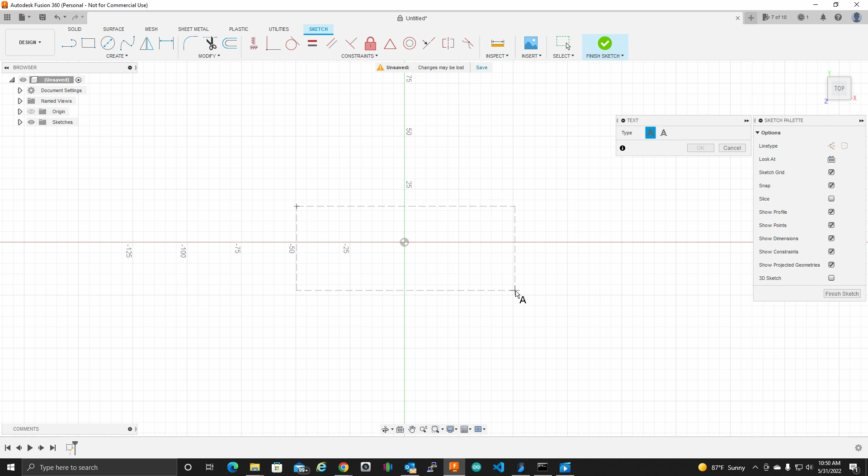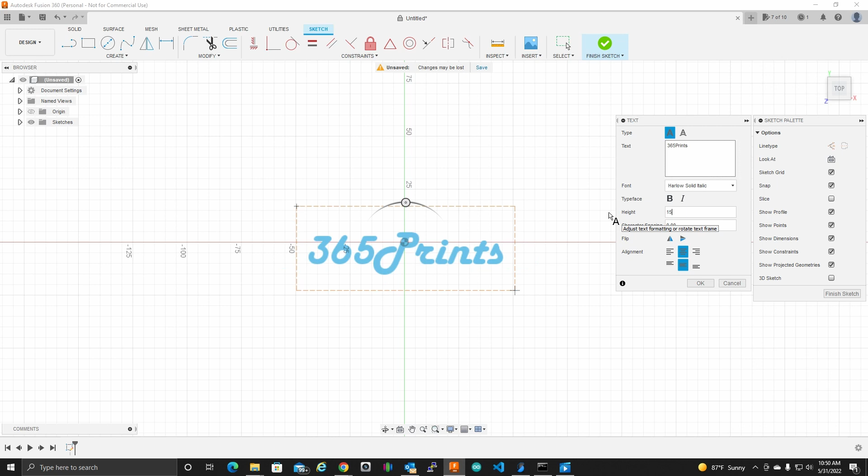I'm going to create a sketch here on the bottom plane. Let's put some text here. Let's do something like that. I'm picking this Harlow Solid Italic font, which I'm not happy with some things, but it's going to work here. Let's bring down that size a little bit, something like maybe 18. Yeah, that looks good. Okay.

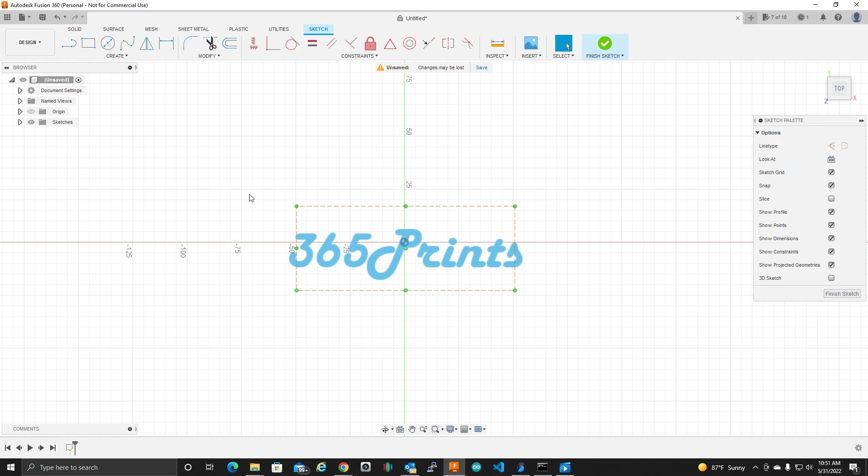I'm going to try to do an offset here of this whole thing. Let's see, cancel. Let me select everything first. And then offset. How come that's not working? Let's see. I need to right click on this. I'm doing this on the fly here, folks, this is the first time I'm doing it. So let's see, explode text. There we go. Yeah, now we'll select everything and hit the offset here. And

I might just stick in some Jeopardy music or something, because we're gonna sit here and wait.

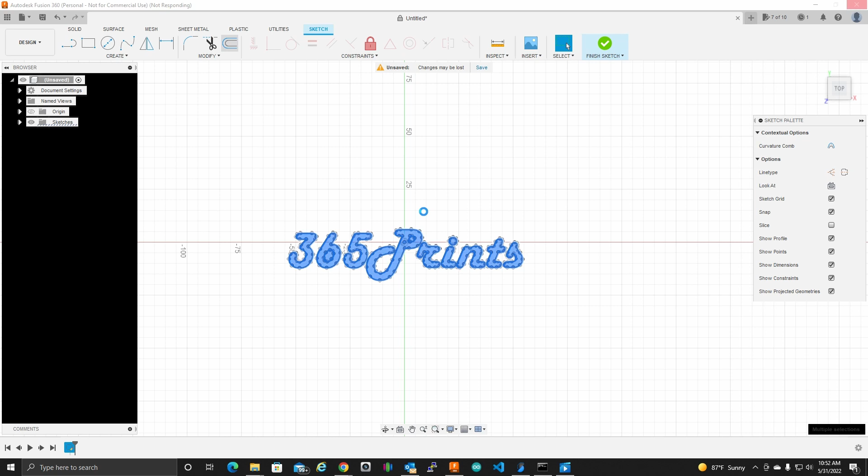This is the only way I really, if I select offset first, I'm able to select like the 3, but I'm not able to continue on and select other objects. So what I'm doing here first is selecting everything and then clicking the offset, and you'll see it's not perfect, but it's going to do exactly what I'm looking for. Okay, so here it's back, and now we need to put in the offset position, and you can see what it's doing here. If we go, oh, I guess that's all correct here.

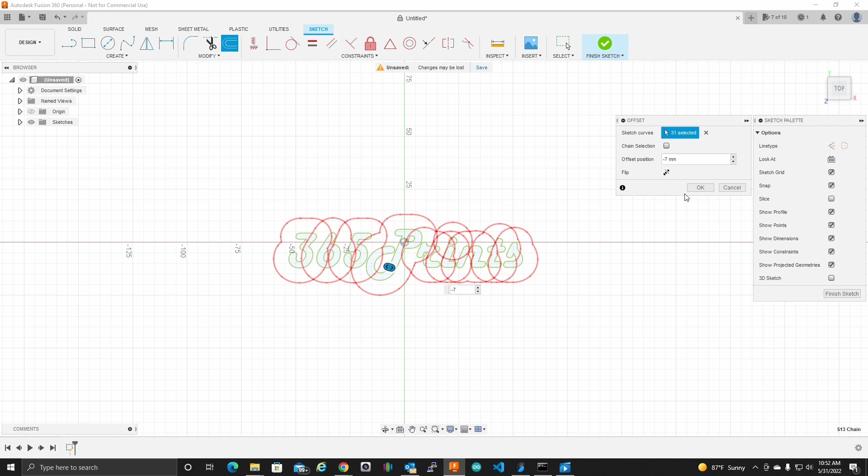So I want to explode this out to maybe 8. Sorry, -8. Why didn't it do the 3? Look how it didn't do the 3. Oh, and 7 it will. That's interesting. Okay, so 7's fine, I'm going to click OK to that.

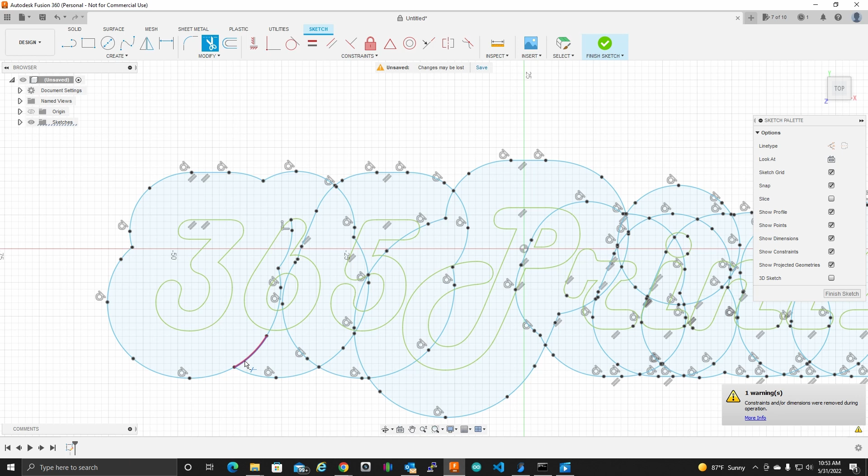Okay, now a tedious thing here, I want to get rid of all of these. I just want the outline here. So, if there's a better way for me to do this, please let me know in the comments. But I'm going to go ahead and start trimming away the items I don't want. See, I just want the outline here. So I'm going to start with those 2 and then work my way in. I may just speed this up for you so you don't have to sit here and watch me tediously do each one of these. Oops, there was a mistake. Control Z.

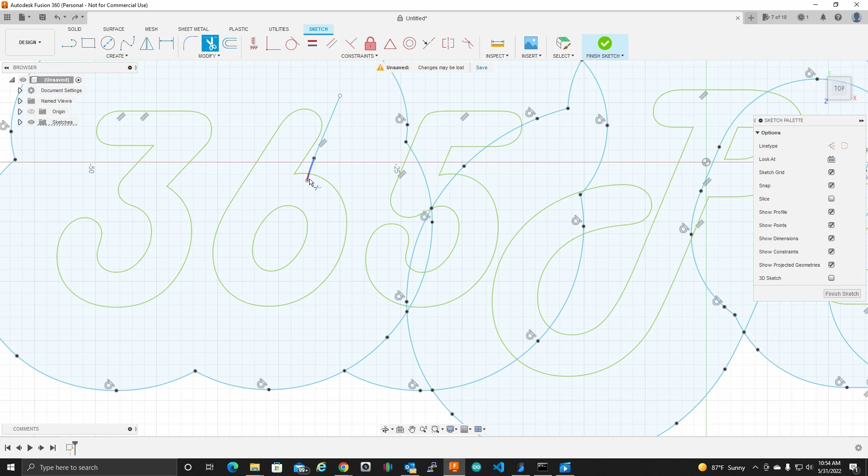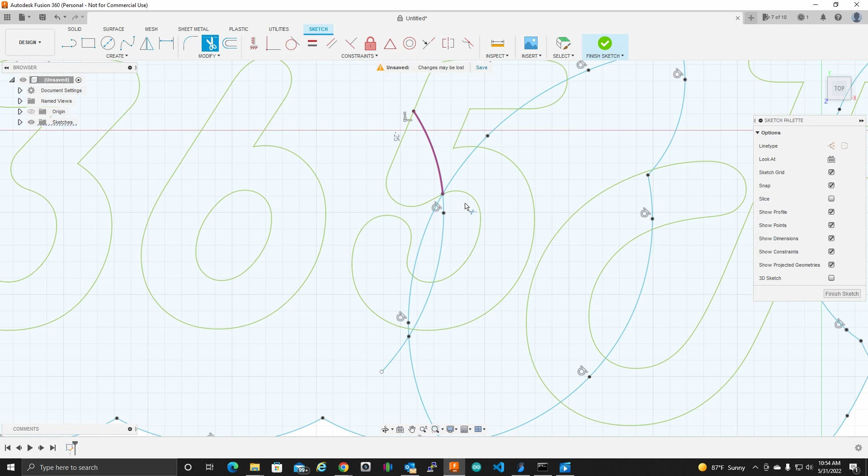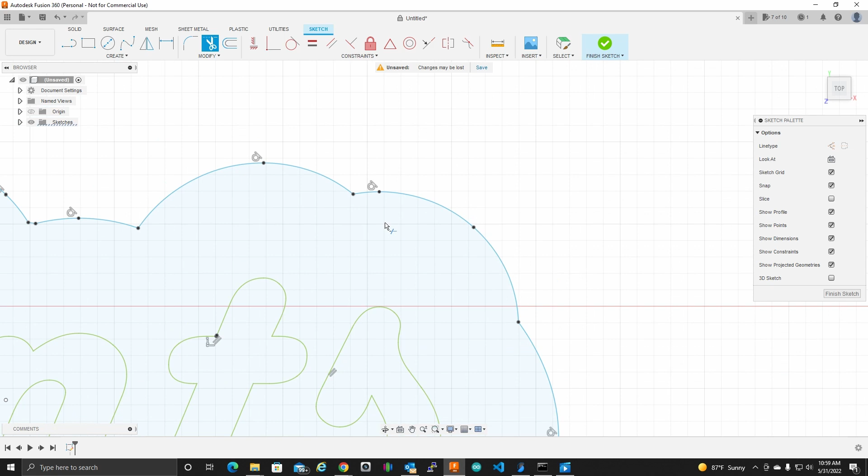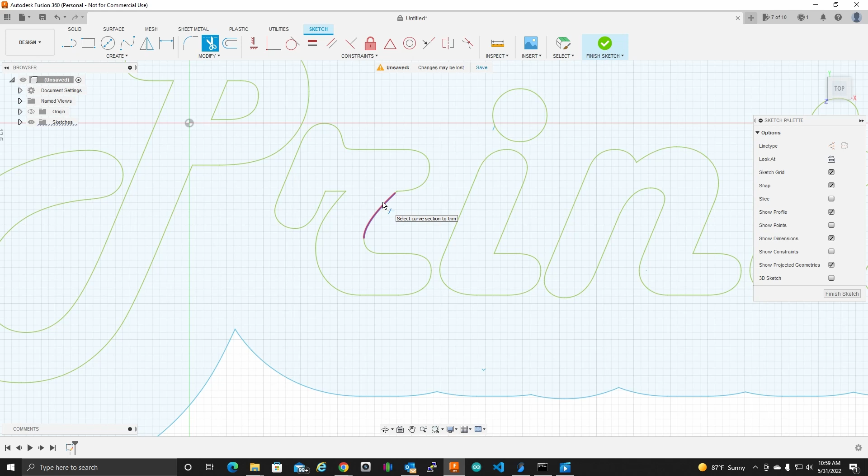Back to trim. I kind of like to start by taking care of this portion and then this portion, and that helps me exactly know what I need to completely get rid of here, which is this full line. Click, click, click, click. We're almost done here, I think. Okay, what do we got? Oh, isn't that pretty? Let's turn off the constraints and the points here. And oh, look, see, there's some residuals. Whoops. Trim. And did I see, look how these ones are showing up here. I don't think these are going to hurt anything, them actually being there, but I'm going to be a little anal about it. Okay, that looks good.

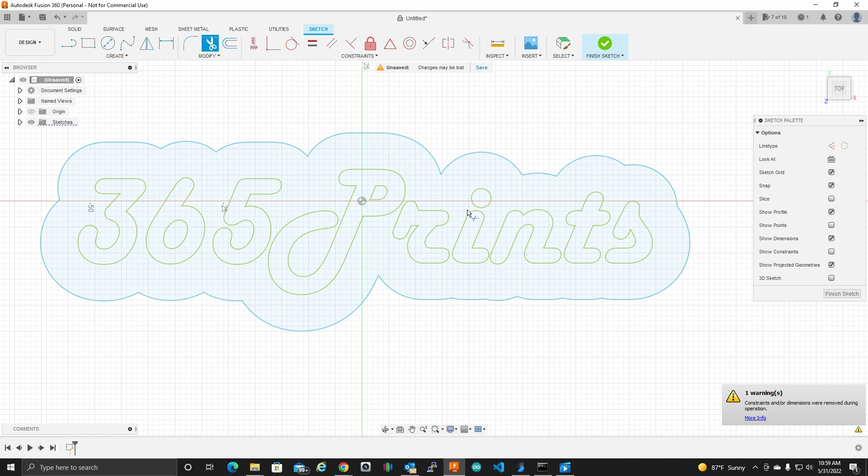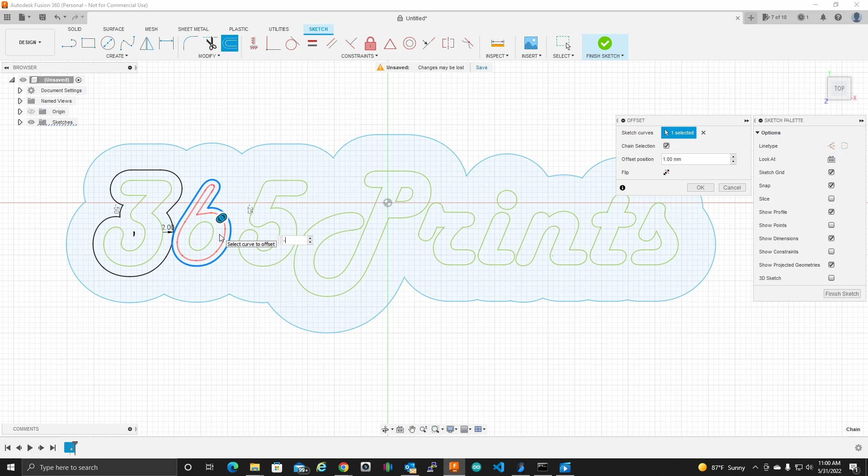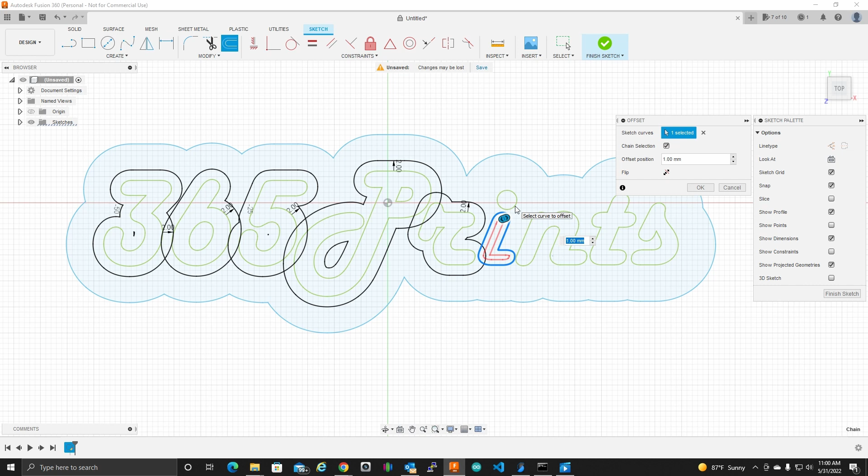Next, we're going to do another explode. We're going to do several explodes here. So offset, let's select the 3. We'll do -2. Boom. Same thing for each -2, for each digit, for each character. Keep going along. -2. -2. -2. You know, if I do, yeah, see, it won't let me select multiples. Why? I'm holding down Shift and Control. Okay, no, -2. And then we want to get the little, we want to dot the I. And -2. Offset, -2. Offset, -2. Okay.

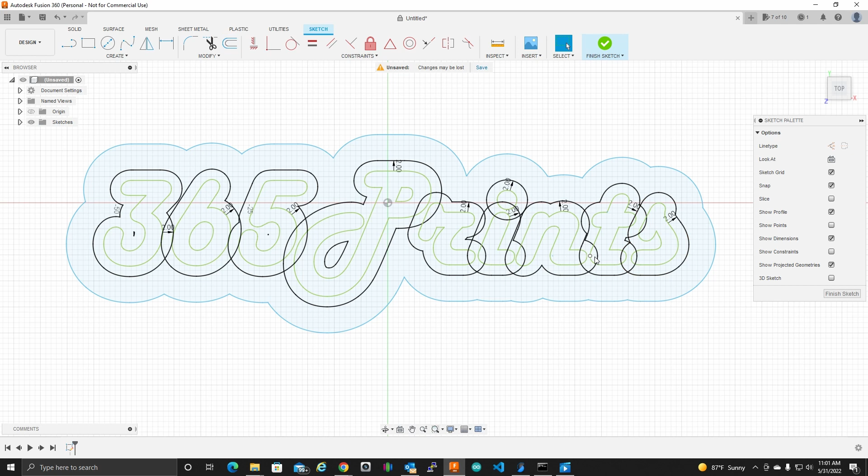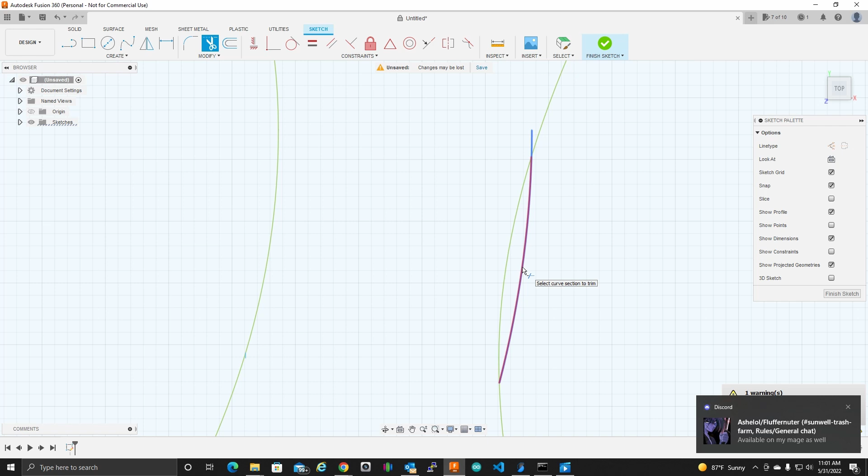We have some more trimming to do here. So I just want, again, the outline here. So we want to get rid of these internal lines here. See, there's my Discord again. Boom, and those are going to stay. So this.

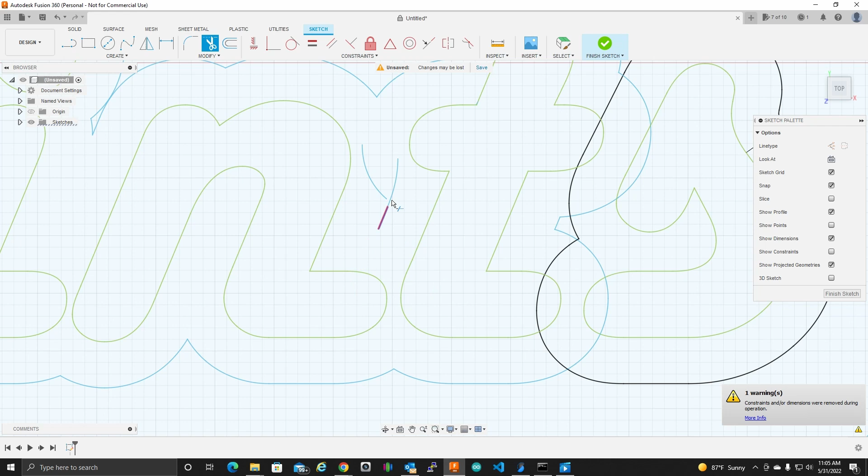Let's get rid of this too. That's silly, that's not enclosed. It's not like this thing, or an I. Okay, that looks good, doesn't it?

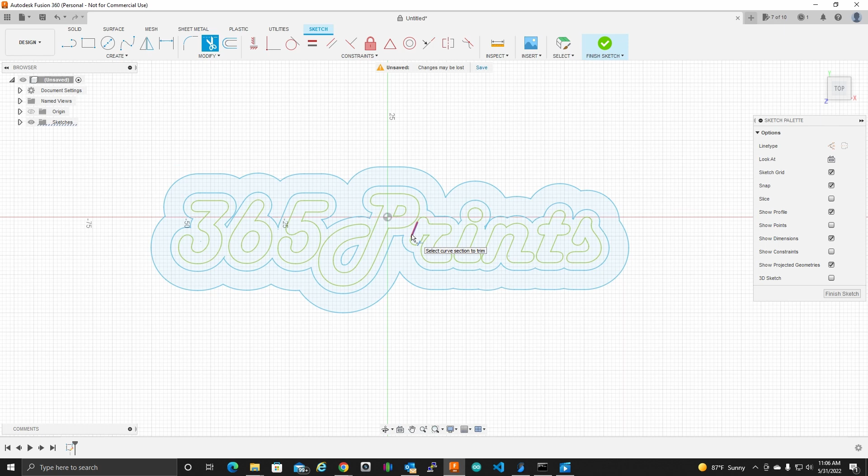Okay, we're gonna finish the sketch. Let's do some extruding. I'm gonna go up. This is just gonna be like a keychain thing. So let's go up just 3 millimeters.

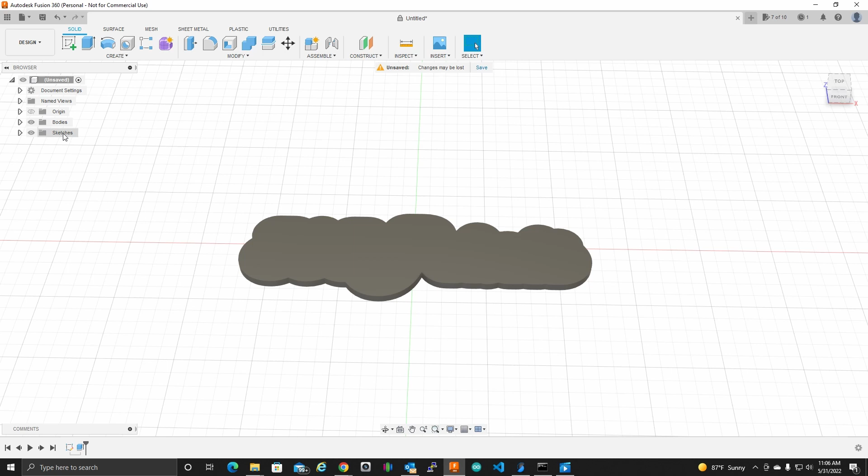Okay, that takes care of that outline. Let's bring back the sketch. I do want to turn off the body temporarily, otherwise I wouldn't be able to select. I'd have to just turn off the body. And now we want the outline, see? But we also want these two portions here. Whoops, what happened there? I want that. There we go.

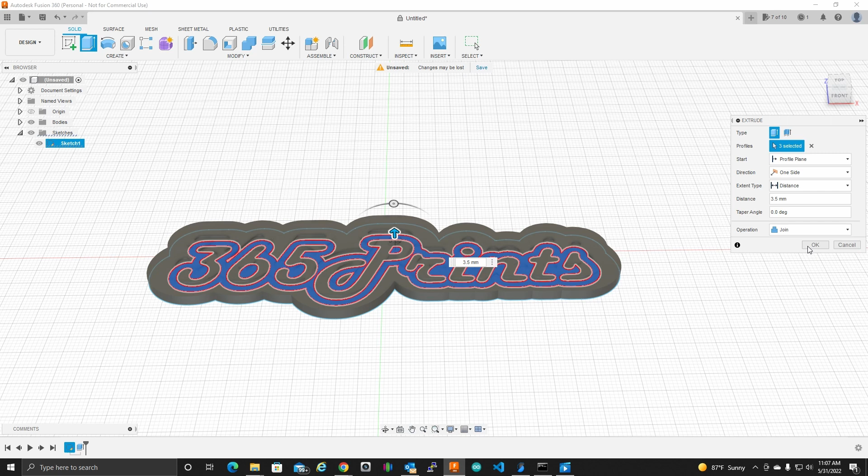Let's extrude that like 3.5. We don't want to cut it, we want it to remain a join. Okay, and then one last extrude.

Let's turn off the body again. And now we're going to do each individual character here. And we're going to extrude that, let's say 4 millimeters. And we aren't going to cut, we're going to join again.

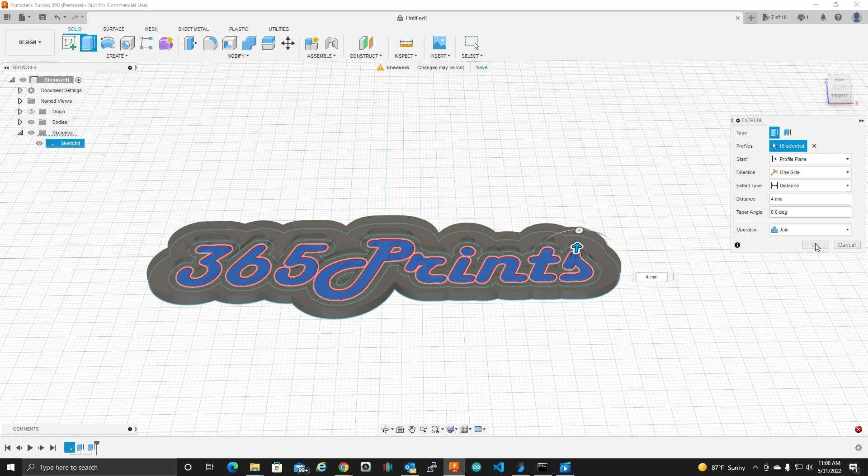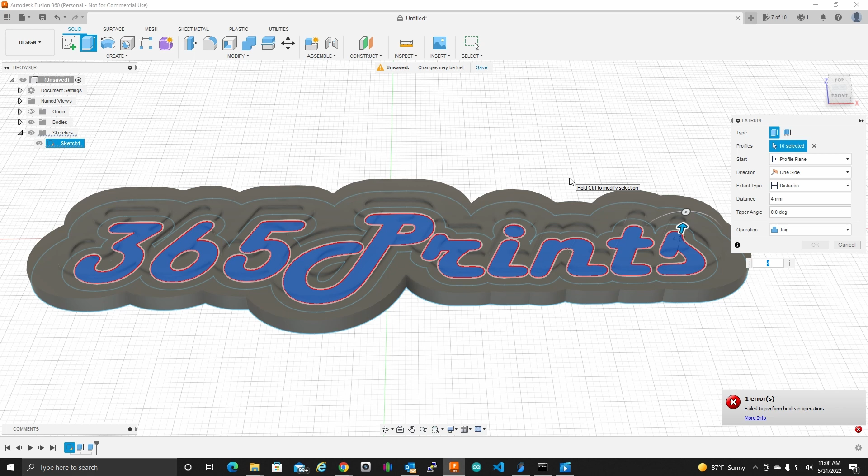I'm not sure if that's even real. Okay, whoa, why can't we do that? Let's cancel. Let's try that again. 3, 6, 5, P. Is there? Okay, a join. I want to do 4. Huh, I wonder why it won't let me do that.

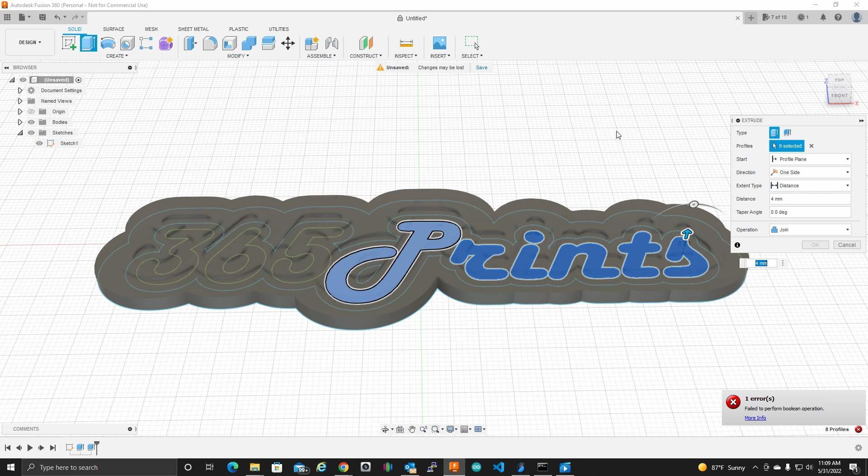It's something over here, is it? Gosh, I wish it would help me. So if I get rid of the 3, what is it not happy with? 13. Okay, so...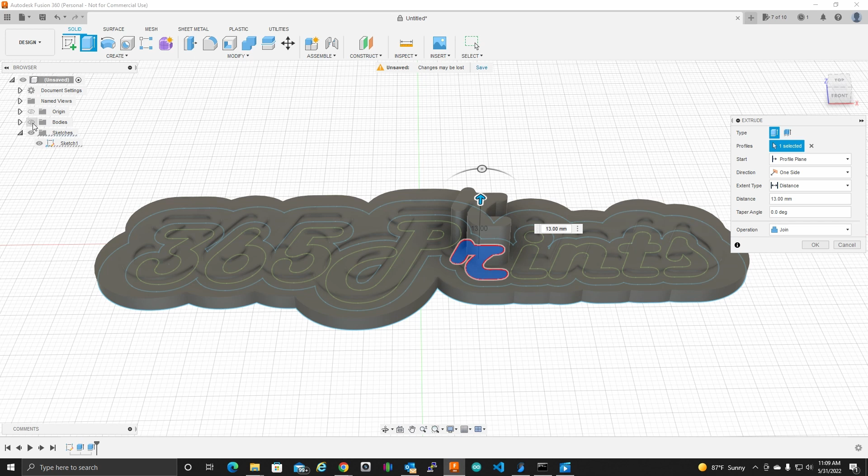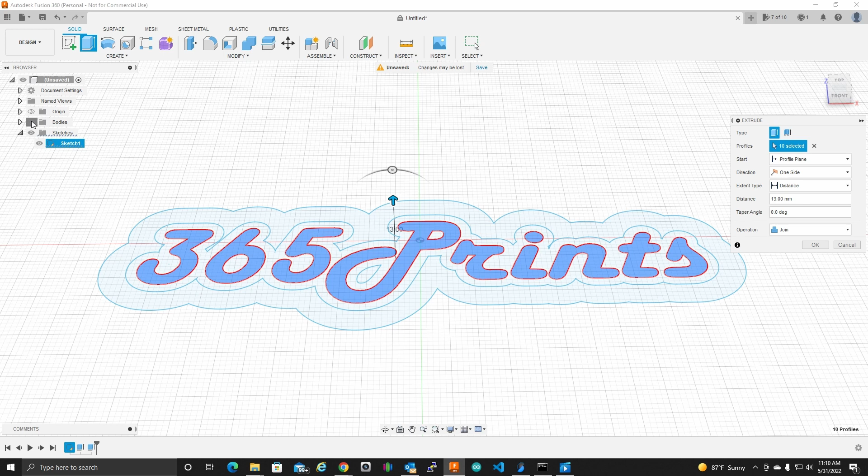Okay, all those letters it's doing, the I, the N, the T, the S, that shouldn't be a big deal, right? Is it this P that it doesn't like? Yeah, it doesn't like the... something wrong with this P. Did I destroy something? Okay, so let's do this, let's go 4.

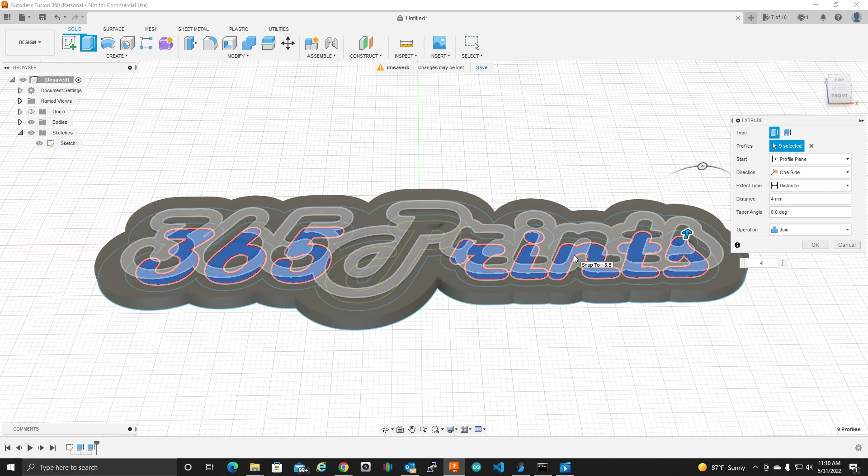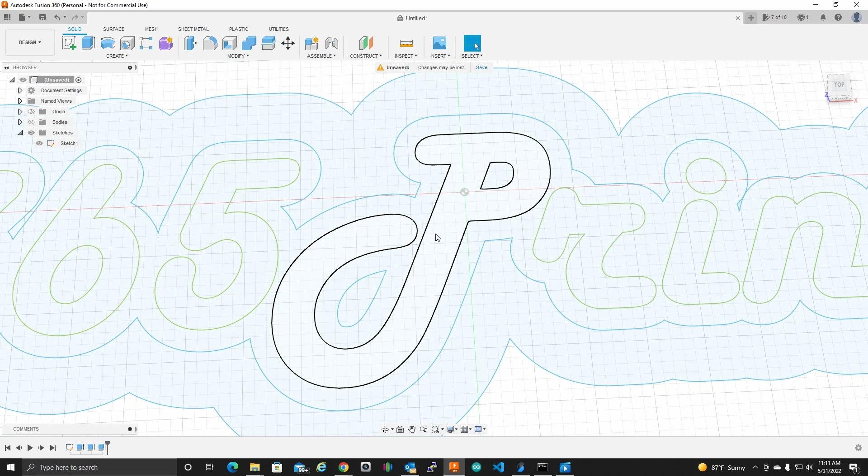Okay, so everything's happy except for this P. Oh my goodness, what is going on here? It's a solid body. I mean, what's going on here? Oh, look at that, do I need to trim this? Is this the problem? Okay, let's try it again.

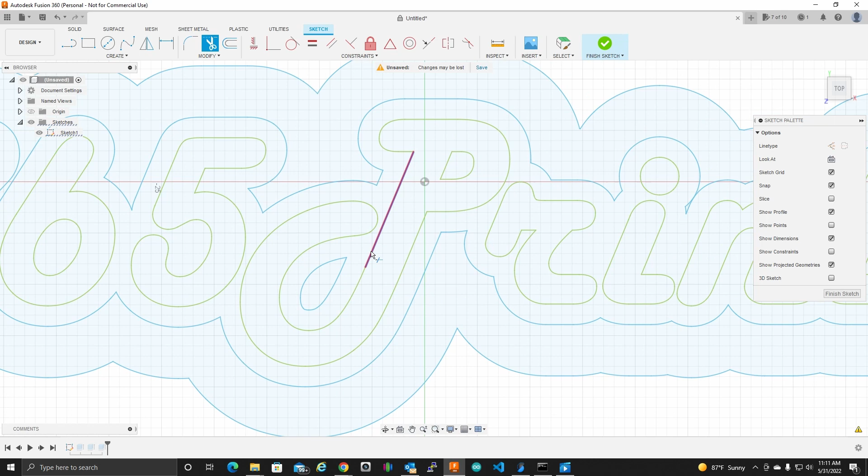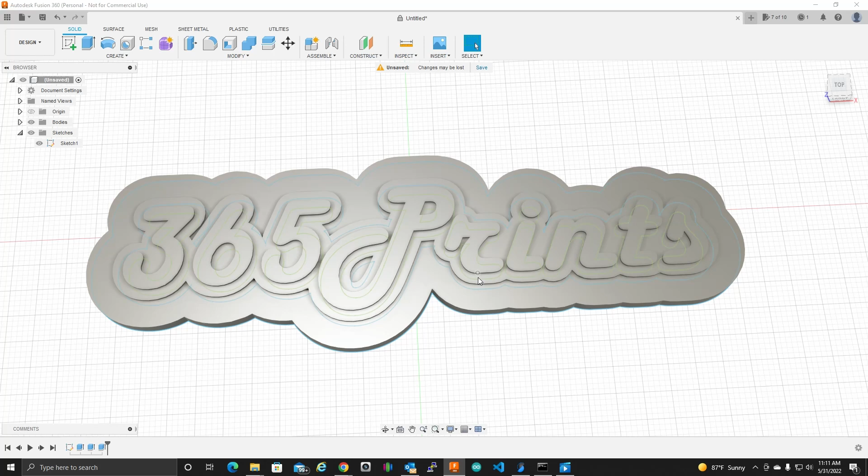Okay, so let's go back and edit this feature, and let's put back the P. Look at that, it worked. Turn the body on, and we'll turn off the sketch. Okay, so look at that, doesn't that look good?

We need a little hook or something over here for it, it's supposed to be a keychain. So I'm going to go use one of my previous videos on center of mass. Let's go to inspect, center of mass, select our object, and okay.

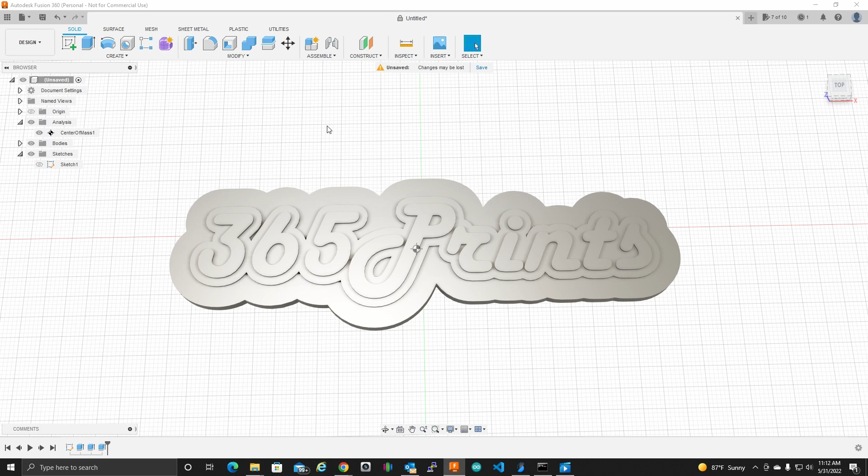And look what it did here. It put this icon here, and it added an analysis section to our tree that we can turn on and off, but it shows us where the center of mass is. So let's see, how am I going to do this here?

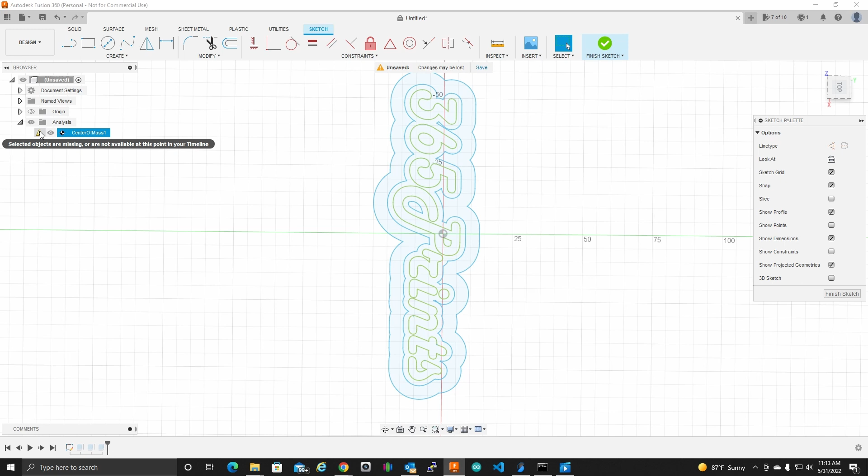Let's edit this sketch, I think would be the best thing. And I can't—selected objects are missing, or are not available at this point in your timeline. So do I have to... that's interesting. So I can't see that center of mass, I have to do a new sketch.

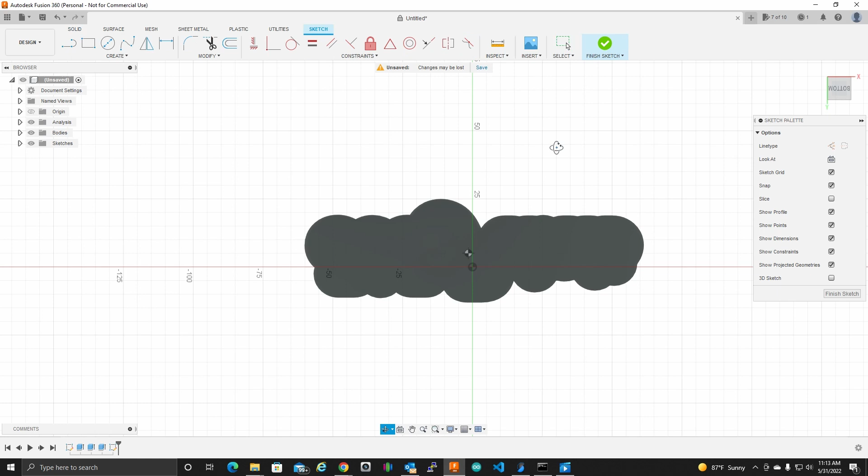Okay, fine, let's do a new sketch. We'll do it from the bottom here. See how my icon for center of mass is still here that I can use? I still don't know how to constrain anything to that. I can't seem to do that because I want to make a line here.

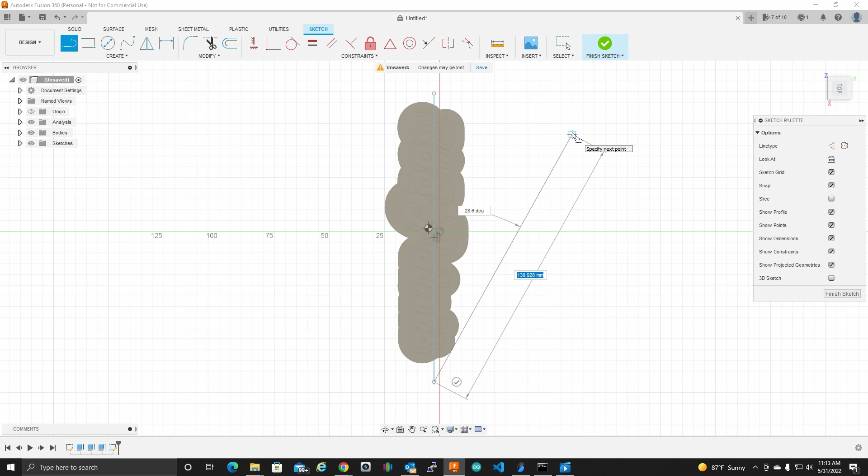Okay, and we're going to go ahead and make that a construction line. And I want to put this line right on the center of mass icon here. So I'm going to keep zooming in and getting this closer and closer. And I'm zoomed in about as far as they will let me. And let's get this line, that's close enough, okay.

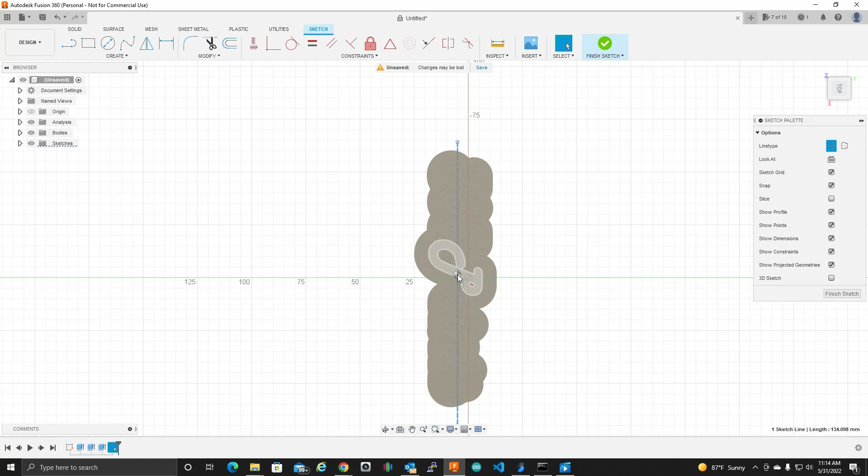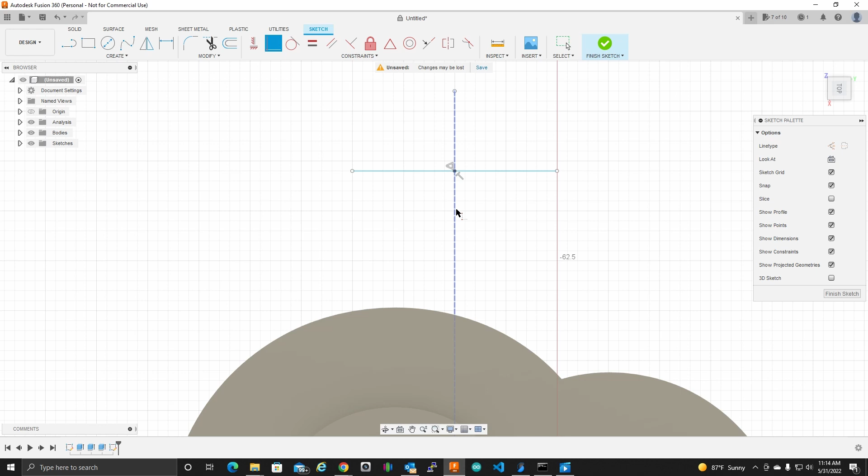I want to use this. Boy, look how close that is there. I want to use this construction. Let's make a line here. And I'm going to put a point on this line right at the center. And then we're going to make a constraint here. There, okay, so now the center of this line lies right on my construction line here.

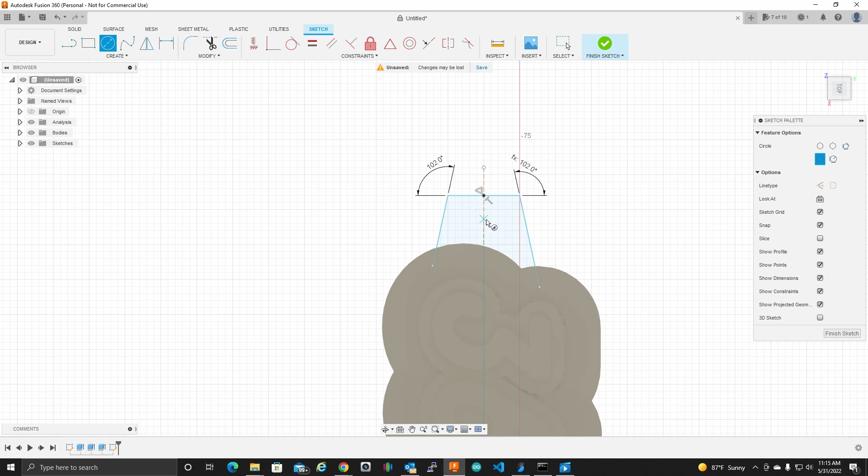Now let's do a couple more lines to connect this up. Something like that. Let's get, let's see, 103—let's go like 102 degrees, and the same on this side. Now we want a hole here about 5 and 5, and let's just make it 5 millimeters. Finish the old sketch.

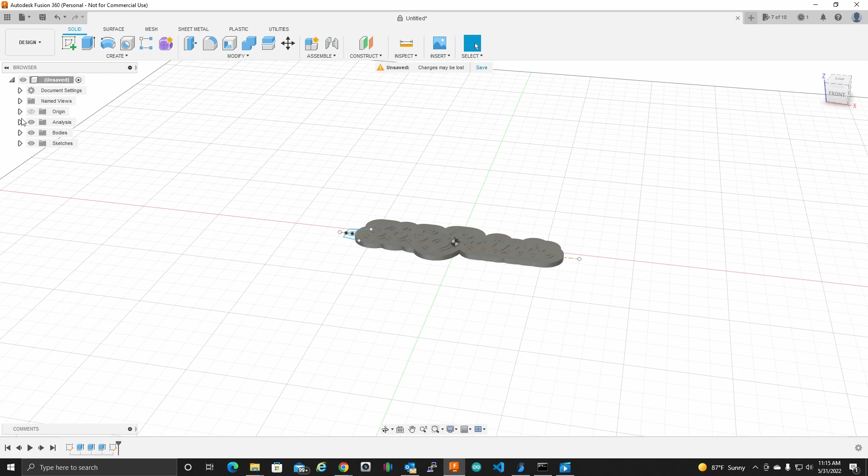Okay, I don't need my center of mass icon. We are going to do an extrude here for this. And what did we do, 3 millimeters? Whoa, that's the wrong direction, huh? Minus 3 millimeters. Now, I believe I do need to do a combine here

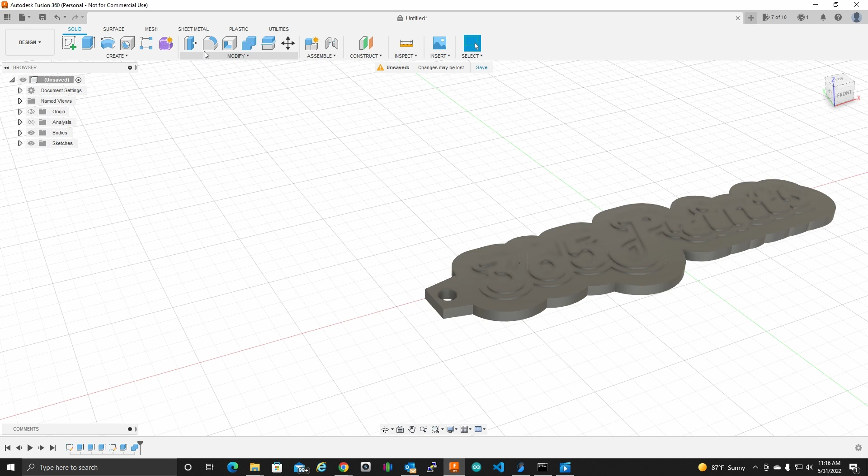because I would like to do a nice little fillet. Let's make this look nice. Oh boy, doesn't that look nice? Now, because I'm adding this, it might be changing my center of mass.

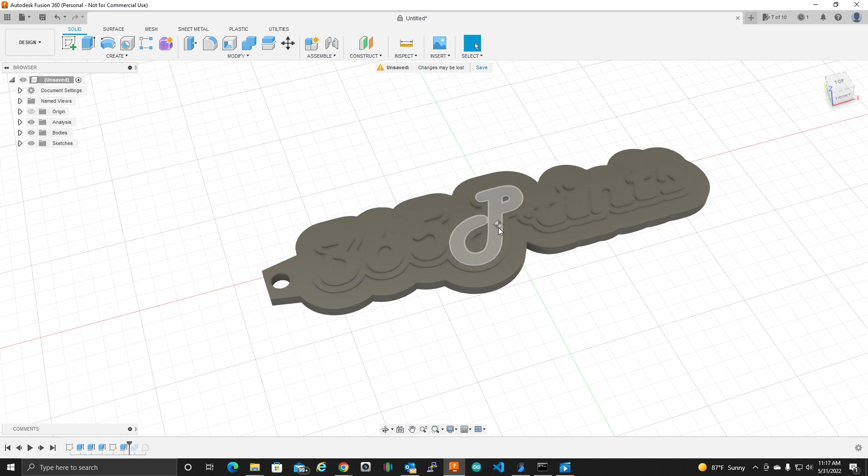God, it doesn't let me turn it on now. It's probably because it has changed since I added this object. A combine has been done. Let's see if we go back before the combine. Yeah, see, there's the center of mass icon. But because I combined this object with another object, that center of mass is no longer valid.

So it removed it. I'd have to do another one. But it's close enough. I just want it so that if it hangs, it's not hanging totally oblong.

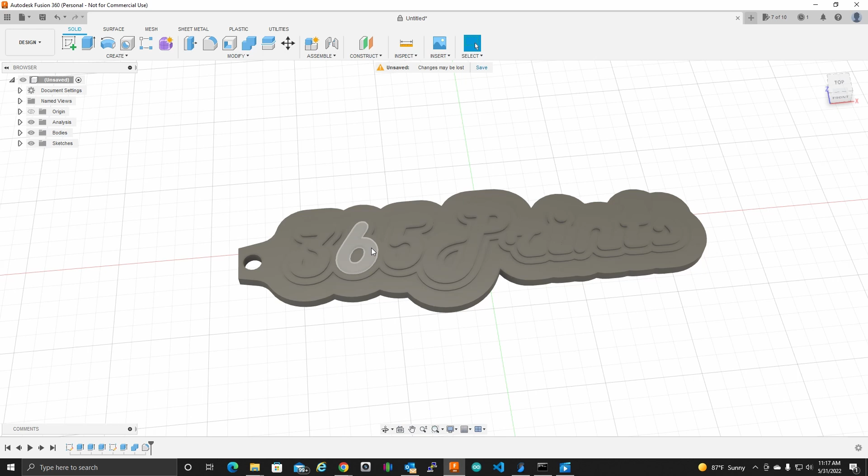I do want to do another fillet here. Obviously, doesn't this look horrible? Let's bring that in. That looks great.

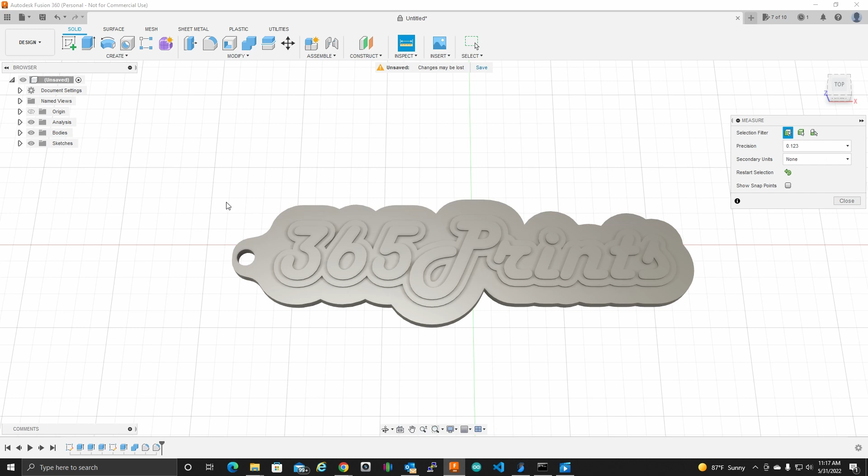Okay. 365 prints. Just let's look at how long is this thing? From tip to tip ish, 128 millimeters, looking at my ruler here. That's a little long, but that's decent. That's fine.

Let's bring this over to the slicer software here. I want to show you something in SuperSlicer that I really dig.

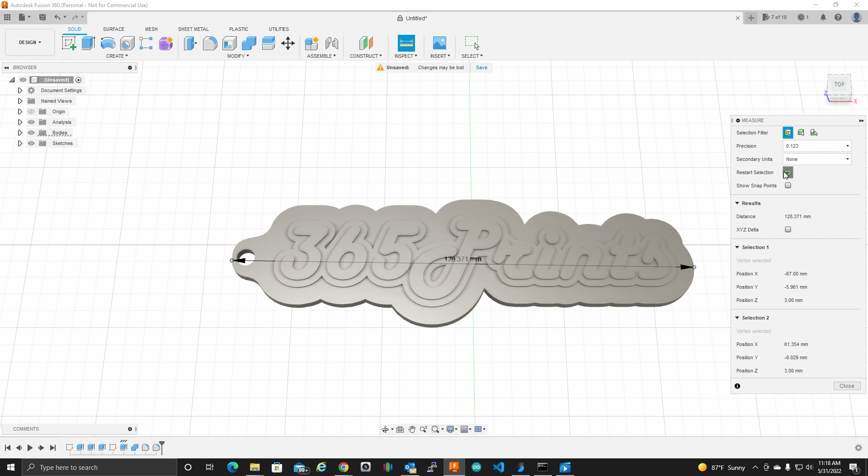Okay, let's bring the item in for slicing. I should have said, I am not a Fusion 360 expert by all means. You probably know this already. In fact, let's save this. 365 prints keychain.

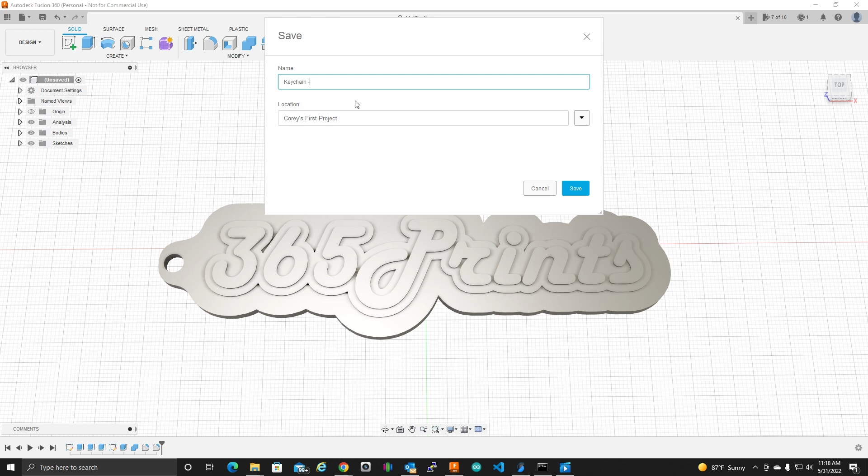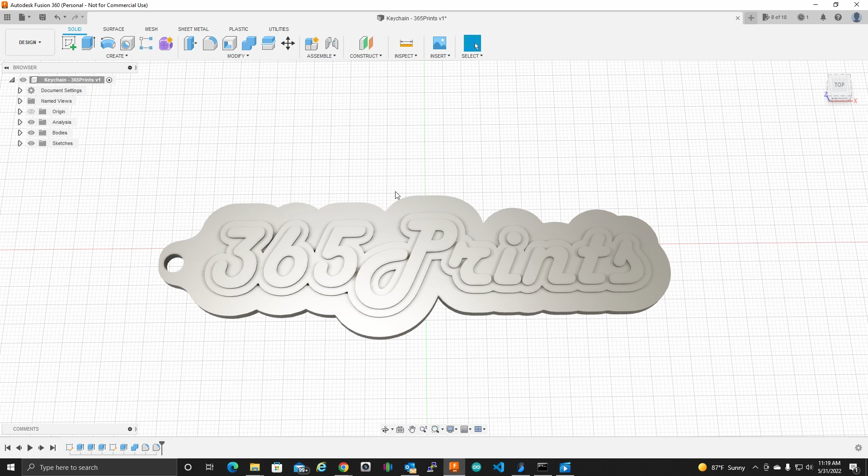Let's look at my sketch here. It's not fully constrained. I'm not the best at Fusion 360. I tend to use it to come in and get what I need done and get out. I want to get back to the 3D printer. So most of my sketches aren't fully constrained. I apologize for that. I'm not following best practices.

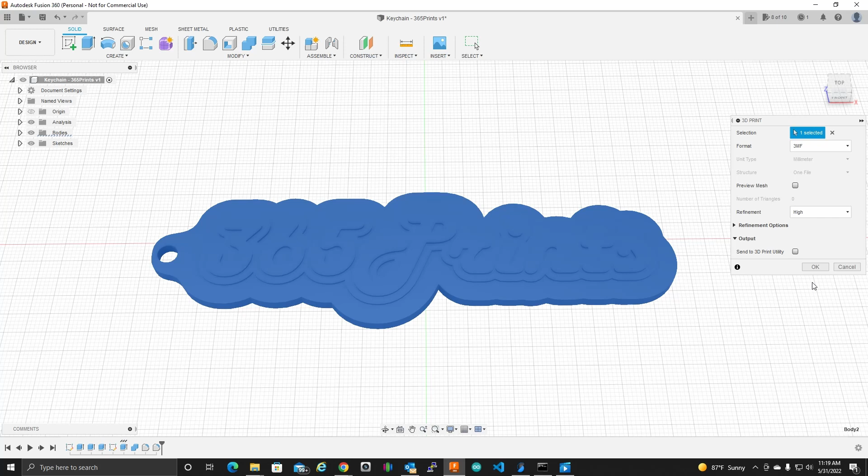So let's get this over to the slicer here. I am going to create a 3MF. Let's select that item. It's going to go to my keychains directory here, 365 prints.

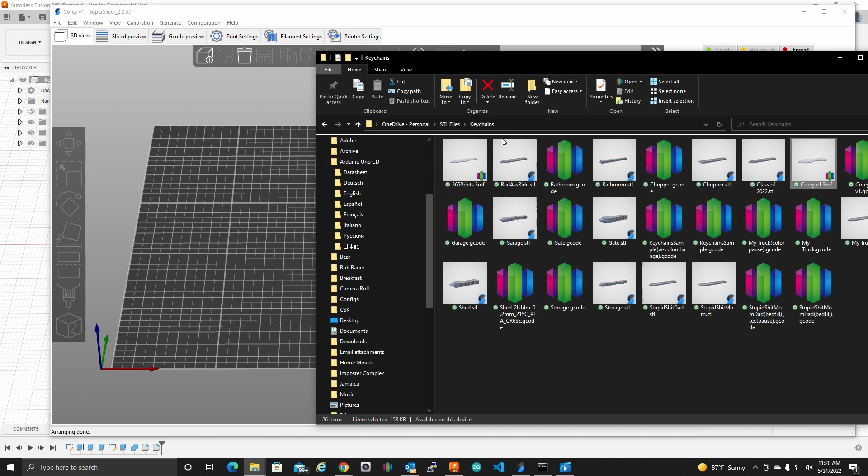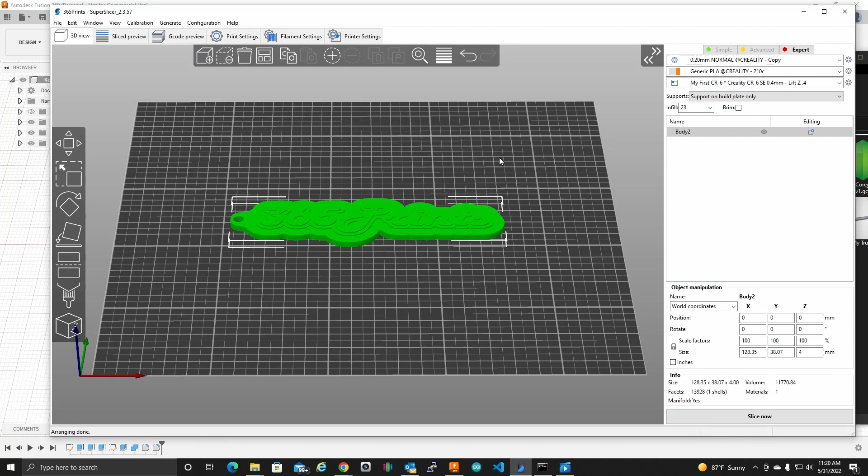Let's slice this. Okay, now I need to drill down here and find where these, okay, so right there is where it's first putting down color on that layer.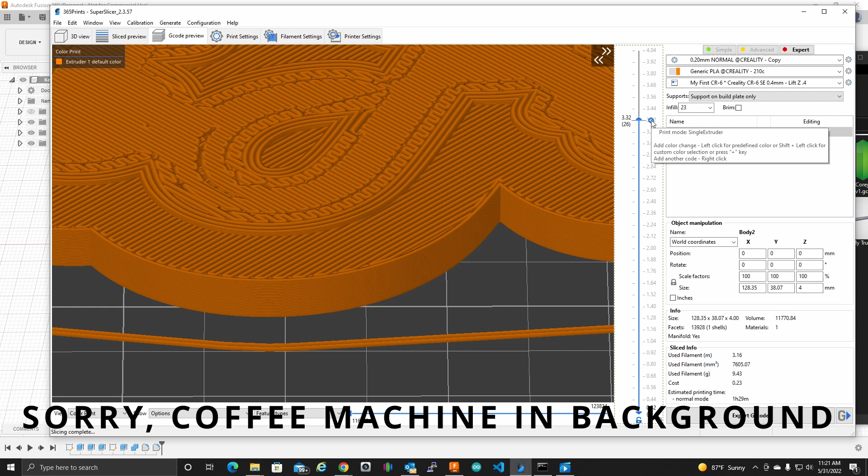I'm going to right click the plus here and add a color change. And look what it wants me to do. Okay, what color are we changing to here? This I'm going to change to red.

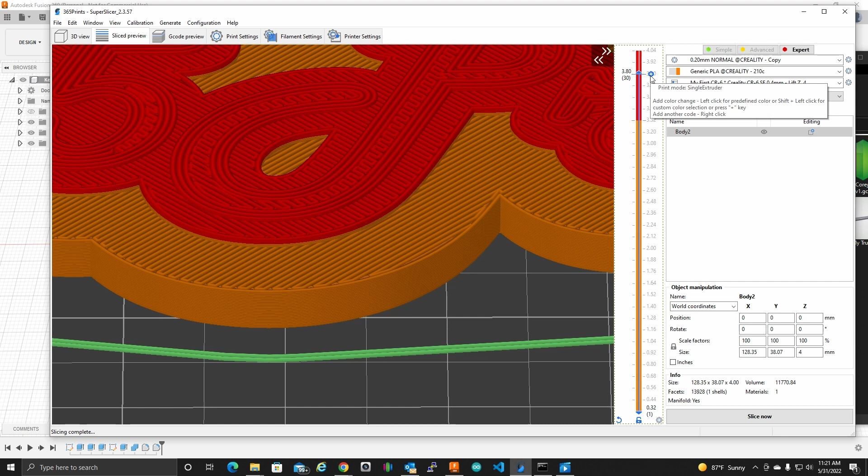Okay, and we need to go up further to this next layer, and it's going to be right there is where it's laying down that layer color. I'm going to right click, add color change. What color is this one going to be? I have a dark blue, that's really close to the color here.

And see what it did? It made this dark blue. So I think I need to slice again.

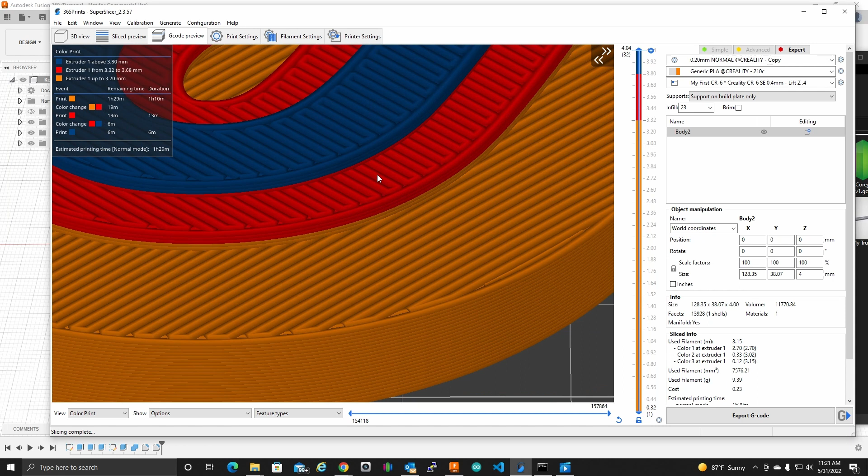And look what we got here. If the view is set to color print, it's going to show us what color filament we're laying down here.

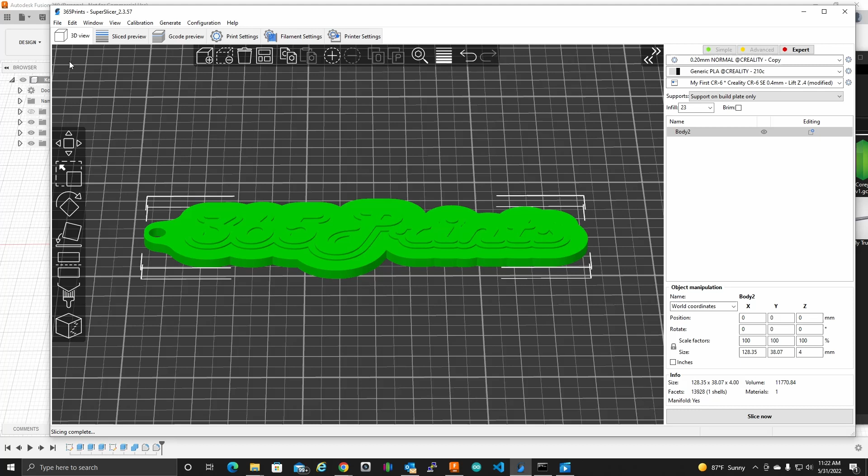Now I need to go back to the printer settings and change the initial extruder color. I'm going to change that to black because that's what I'm actually going to be printing with. And let's do another slice.

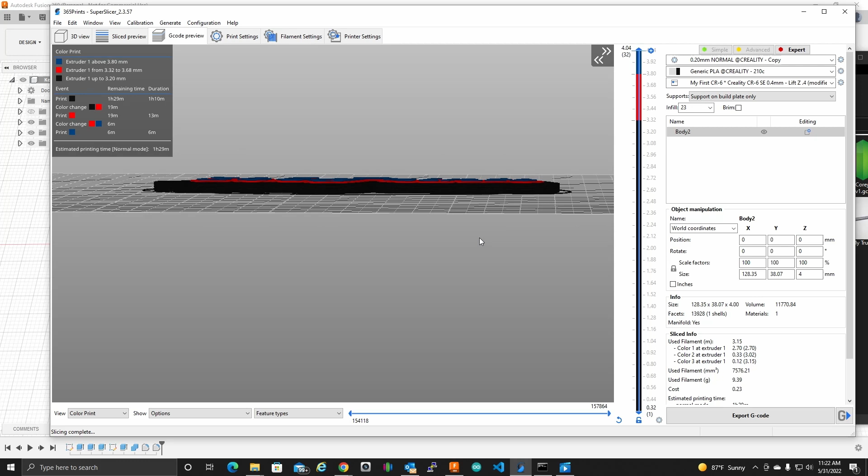There we go. So that is what my keychain is going to look like on the print bed with the colors. Look at that. First I want to lay down some black, and then I'm going to put a red color on that layer, and then finish it off with a blue. Yeah, that's my keychain. Let's export the G code.

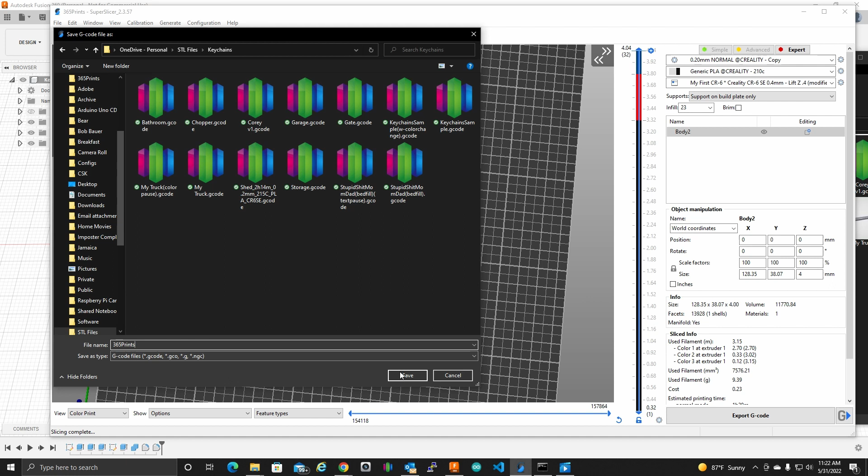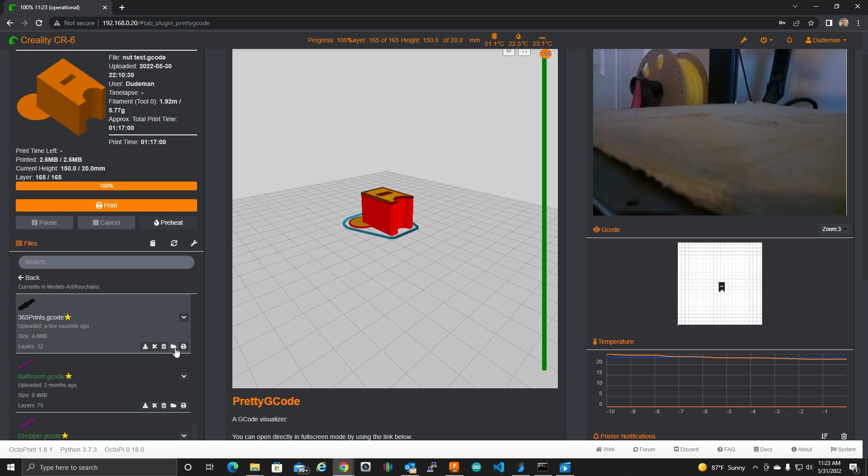Okay. And here is my OctoPrint session. Let's go to my keychains. Where are they? Here they are. 365Prints. Here it is at the top of the list. Let's load that. And look at that.

All right, I'm trying to find my nozzle here. There it is. That's where I want to be. Okay.

This is a plugin called PrettyGCode that I'm using. And I need to change the filament and remove my little dust cover here and click the old print button. We're going to start this sucker. So, yeah, stay tuned.

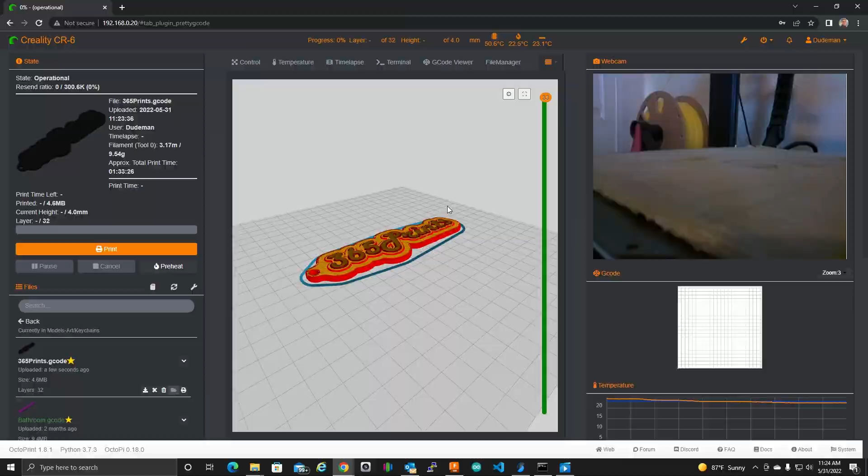Oh, here it is. Okay.

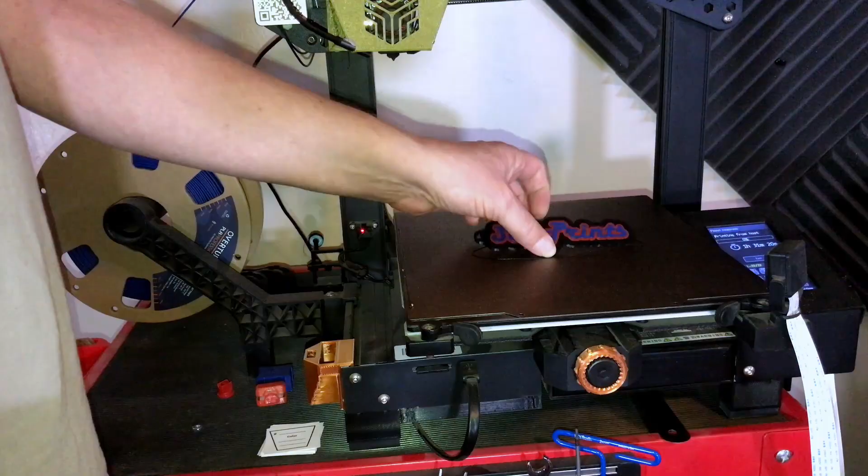This came out a lot better than I thought. I already put a little ring on there for, I don't know how well, it's not going to focus. I'll have to take some good pictures of this and show you. But boy, that came out a lot better than I thought it would, to be honest with you.

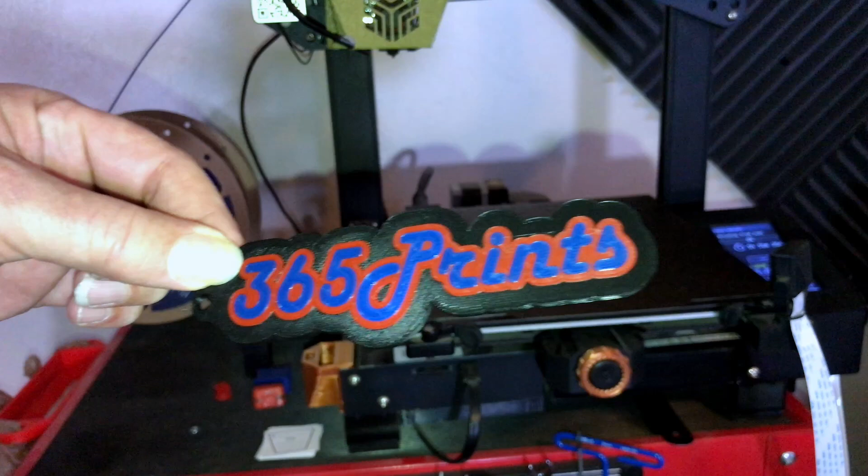And it was this is my first try at doing a tricolor change like that. So yeah, that came out very well. Thanks for hanging out with me at 365 Prints.